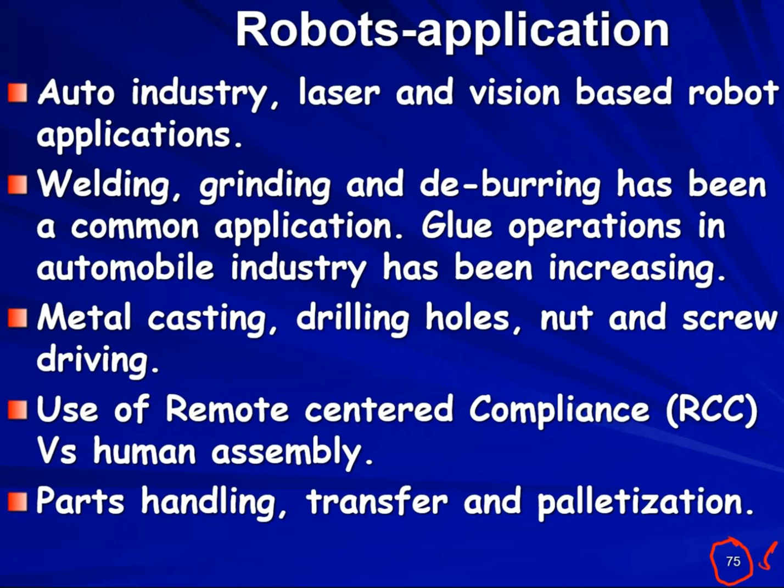Parts handling, transfer, and palletization. Palletization is a word that is very commonly used in robotics, or rather in automation. Palletization is stacking row by column on a wooden pallet so that it can be wrapped and sent to the shipping for distribution. So robots are capable of doing palletization with custom written programs.

Punch press. You don't want to have a human working on a very heavy duty punch press, which can generate a fair amount of forces. So robotic loading of punch presses is also a common automation application. Loading of ingots into hot furnaces before forging is again a standard application.

Now, something not mentioned in the notes. Siemens has a jaw - I wouldn't say mechanical jaw, it's a mechanical and electrical combination. What it can do, if the CAD can program the gripping positions of the robotic gripper, as the part comes out of the furnace, it can automatically press on the part. It's almost like pressing on a hot ingot to form the shape of your final product and then cut it, so that minimal amount of work is done in turning or milling it to the final product. So Siemens has one of those in place.

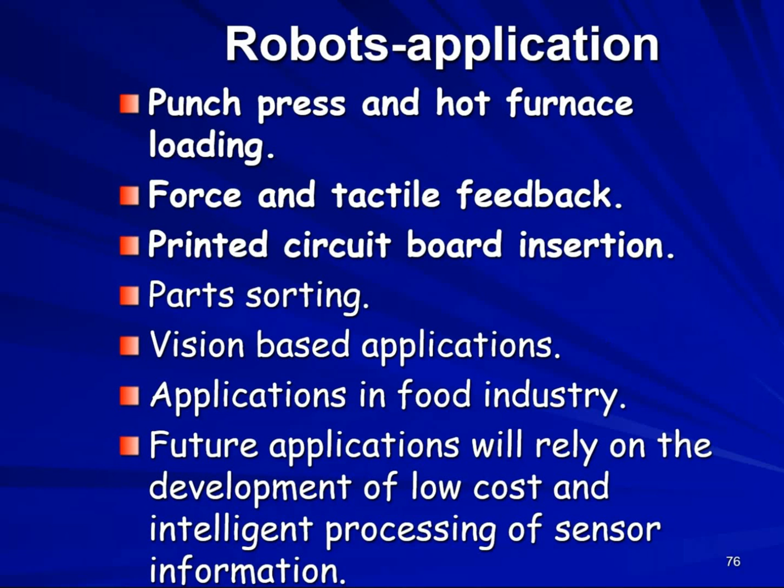Shape memory applications in automation is also there. How many of you know what shape memory is? Either in one of the material science courses, I hope.

It is actually a fairly big section by itself. Shape memory alloy has the property that if you heat it, say by 20 degrees Fahrenheit, from room temperature, which is about 68, up to 90 or 95 degrees Fahrenheit, the alloy will contract, not expand. If you take a guitar wire 1 meter long and heat it by a 20 degree rise, depending on what it's made of, it'll expand in length. The shape memory wire, say 10 microns in diameter, if heated by 20 degrees, a 1 meter length will contract by as much as 14% of its length. So for a 1 meter wire, you can almost see a displacement of 14 centimeters contraction.

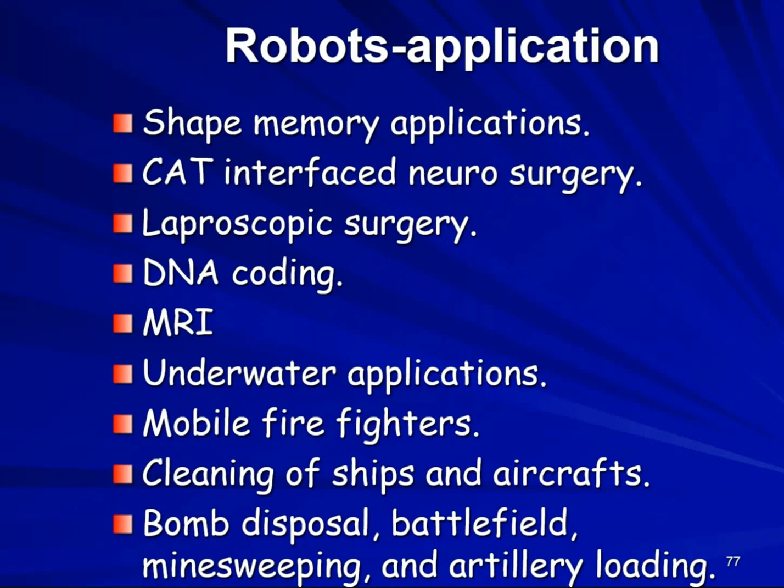Robot tailors: you want to pay $1,000 for jeans, custom developed, custom stitched to fit your contour by computerized machines. All that you have to do is stand on a revolving table and cameras scan your body and take measurements, supply them to the controller, and bang, you go. You get it within 1.5 hours.

Tree climbing robot. Well, this is something that BC, British Columbia, was very much interested in, and they do have something going. Basically, when they want to cut very tall trees, if I can launch a vehicle from the ground which will negotiate the tree branches as well as chop them and bring them down slowly and steadily, you don't need to worry about humans getting injured.

Well, I do have a machine in my house, custom developed, which will climb poles like a monkey. Again, I did this work with Nish when he was in school.

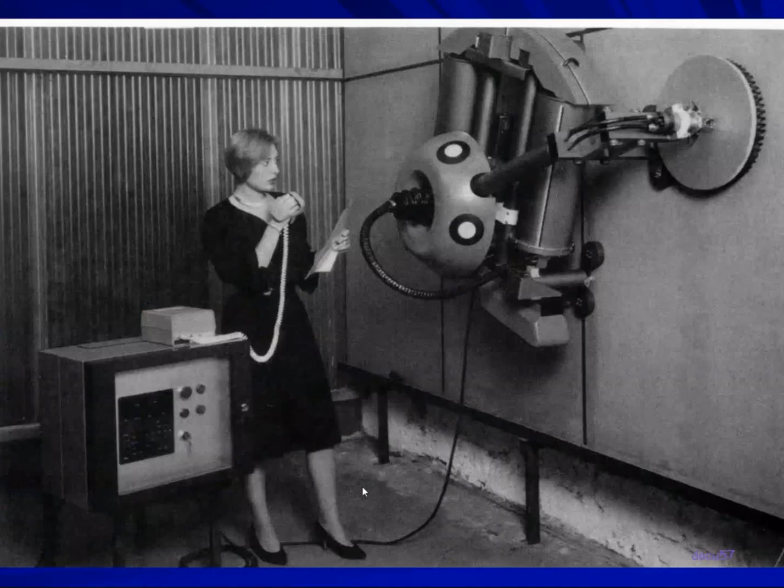ambulations. So the biologically inspired machine, which is also called biomimetics, is a fair amount of work that is being explored in this area. In fact, I have about 10 hours of presentation on this aspect, but again, it doesn't fit with this course structure.

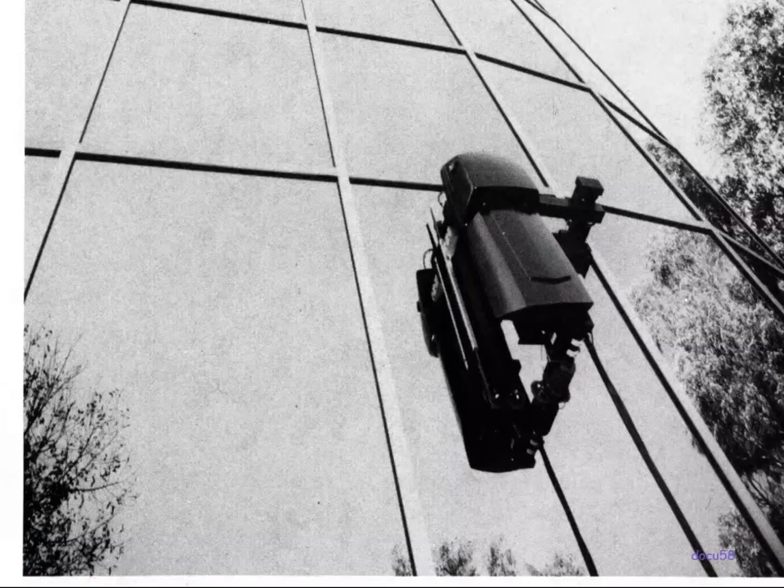Now, I talked about cleaning of the hull of a ship. This is way back 30 years. Archive copy, black and white. Now, this is a French invention. So the principle is what is important here. So what you have here... Oop. Yep. Yes, my pen writes.

What you have here is a wire brush which will spin with the motor here. Okay. Now you have underneath here a magnetic clamp, and you have suction cups here. So these two can alternate or can be gripping the metal at the same time. Because it's got a magnetic gripper here, obviously for non-ferrous metal applications you have to come up with something else.

So this is what will happen. Let's say the vehicle is grabbed here and here at this location. Then you start spinning this. It'll clean this area, and it's also a boom that can move or rotate so that you have a sweeping surface here that it'll clean. Then you take the suction out, keep the magnetic clamp, reposition this here, okay, and then clamp this and reposition this here. You will start propagating in this direction.

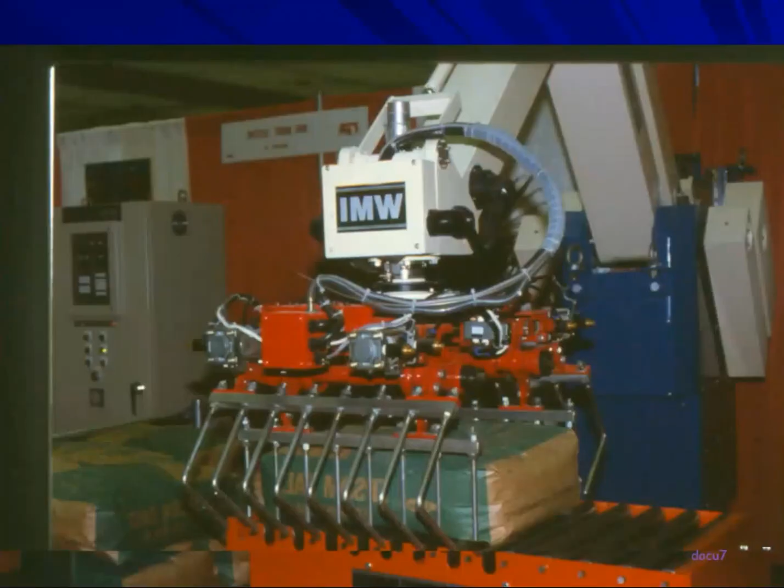Now, in the robotic applications, nothing is more important than what goes as the end of arm gripper. It's called the EOAT, end of arm tooling. Okay? Now, I constantly talked about handling sandbags, salt bags, cement bags, whatever, 25 kilograms.

Now, here is an application where a sandbag is posted somewhere downstream here, away from the scene of action. Let's say somewhere here. As you see now, there are a lot of bags here. Somewhere further out, it is being filled and sealed, and it is finally transported into this conveyor. And you want to take it and start putting it somewhere else. How would you grab the sandbag from the conveyor? Here is a neat idea.

Okay? So you see here scoops cut on the conveyor, and you see these fingers, many of them. There will be a similar set on the other side. So when you actuate this gripper, these fingers will go hug the bag and their end will go underneath. So it's like grabbing with multiple fingers and then lifting it, because the instability of the bag will not allow putting suction cups or whatever other type of grippers on top to lift it. So here is a device commercially available to handle that type of flexible material that is being packaged.

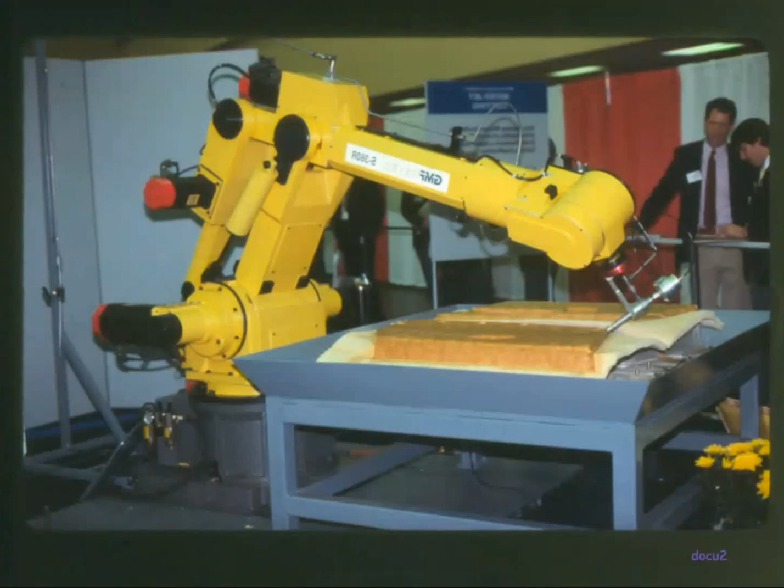Okay. Now, here is a panel which is fiberglass and is being worked to trim it. Fiberglass, whatever, you don't want humans in the loop. So this end of arm tooling here will allow it to trim the panel after it comes from somewhere else to the precise shape, a robot application.

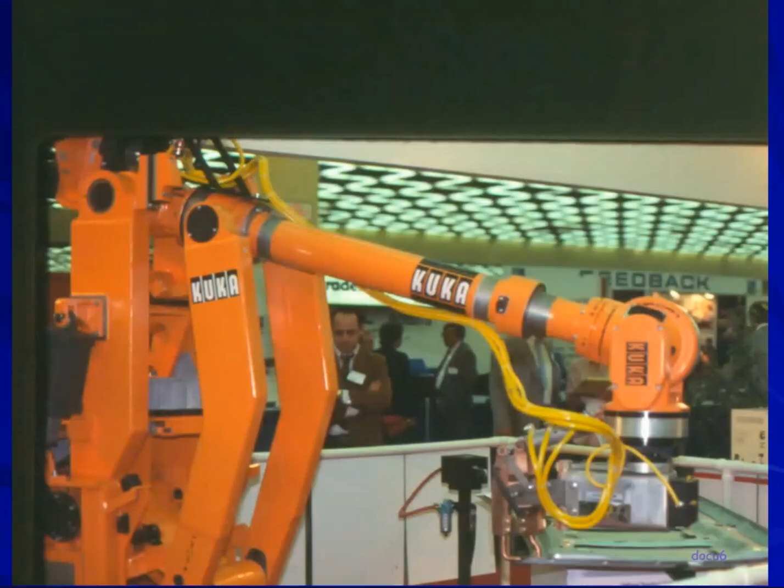Now, what is shown here is a spot welding application. In the case of a spot welder, you have the panel held in a fixture, so you don't move the panel. You move the robot arm with the spot welder, which looks massive, and then go and spot weld wherever you want. Okay, so the payload is consumed by the spot welding gun that is attached to the robot, because it doesn't have to carry any other load.

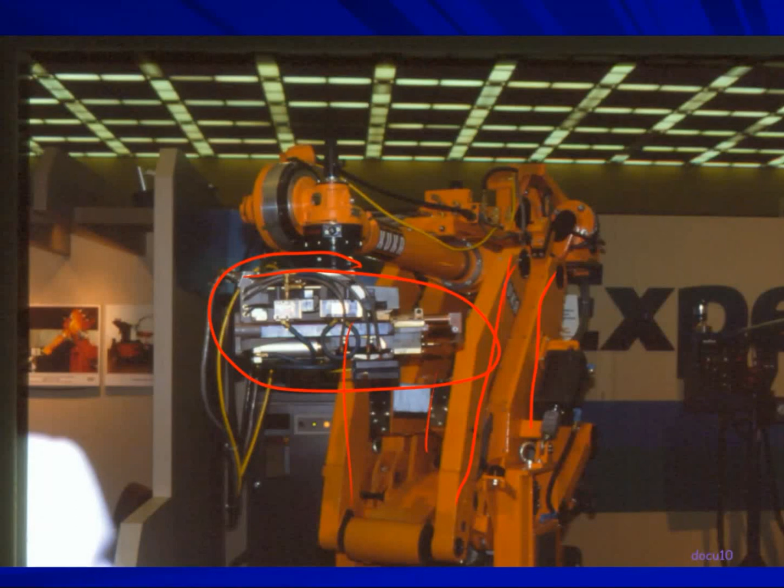Okay? Now that's another view of the spot welder. You can see how massive it is, and you can also see the parallel arm configuration, articulated configuration robot used. Another view of the robot with the spot welder. It's made by KUKA, and I have a KUKA in my lab, and this is a Nachi, which doesn't exist anymore. That company has become something else. Basically, why I brought this slide is to show the massiveness of the end of arm tooling, and they don't need to carry any load. They move to the workplace.

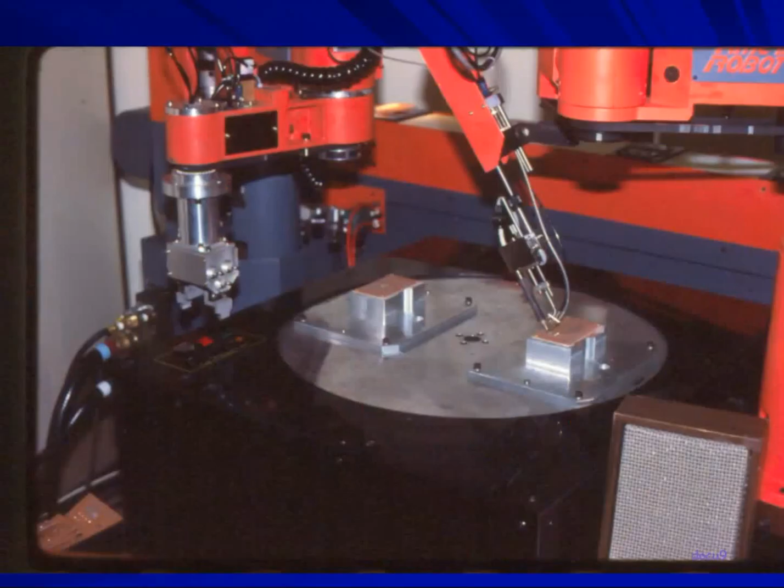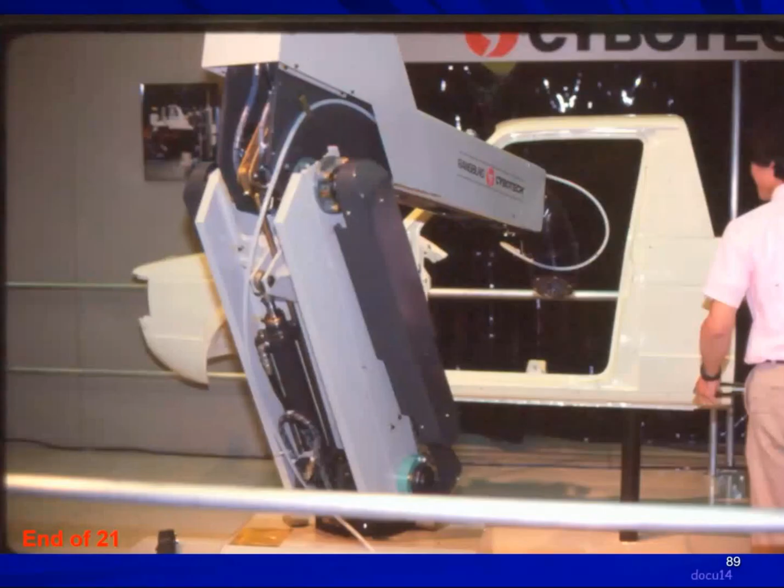Now, soldering and desoldering in the electronic industry can be combined by using, in this case, a SCARA configuration robot. This is the end of arm tooling that will do the job of solder and desolder. Okay, painting, very standard application you are going to see in my videos. Printed circuit board population. Here I have a SCARA configuration doing the job.

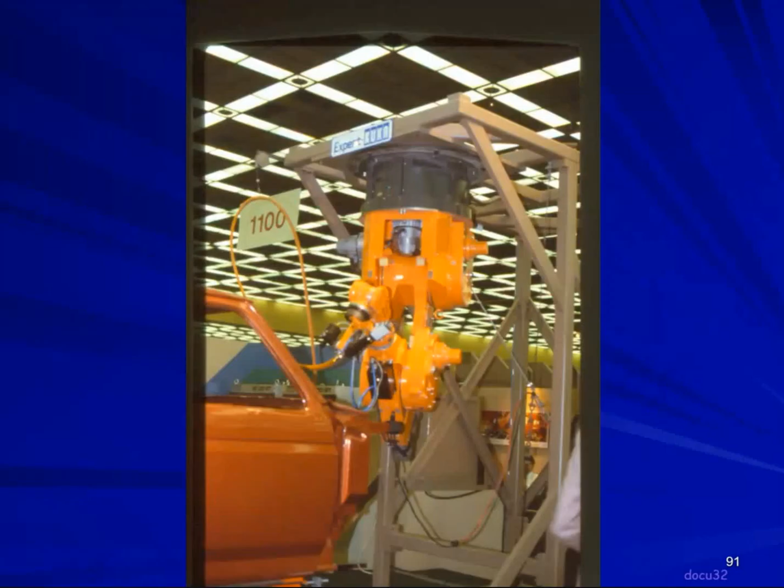Okay, I think I mentioned this. A robot can be hung upside down, but if a robot is designed to be put on the floor, you don't hang it upside down. There are some parameters that have to be changed, some mechanical design that has to be changed, but it can be done. It increases the work envelope substantially.

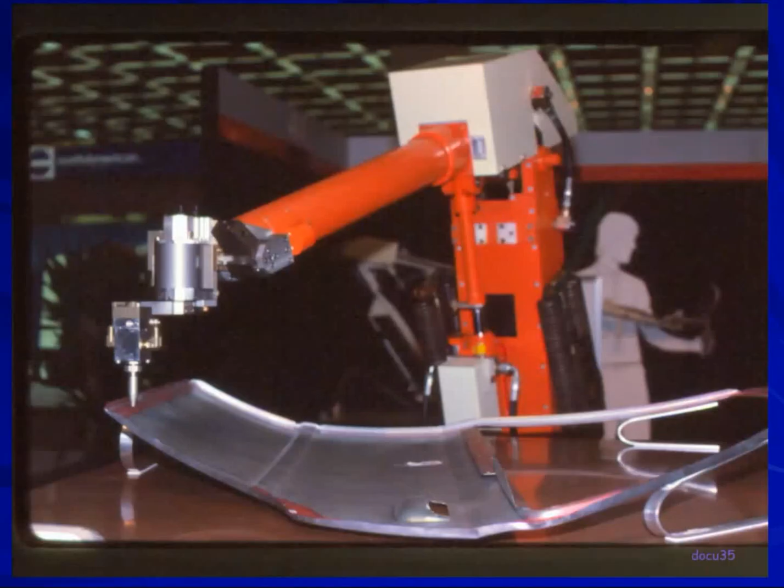Okay. Now, here is a case where all that I want to do is to pour glue all around here on a contoured body. So this is my glue gun, and you program the machine in whatever way you like. It'll accomplish the job without any problem. Plus the size of the bead is going to be pretty repetitive, consistent, as opposed to a human doing the job. It's like caulking. If you want to replace the caulking on your tub because it's old and has mildew deposited, well, you try caulking for the first time, you're not going to like what you did.

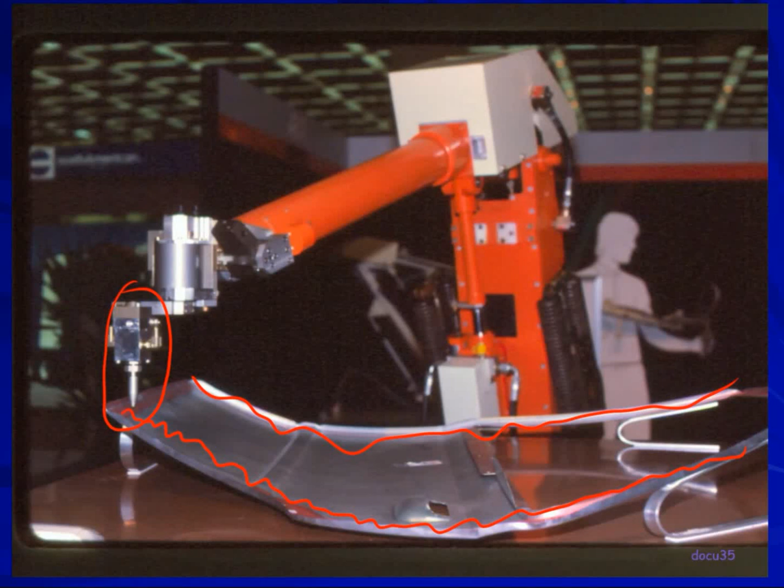But with experience, you will gain there. With the machine, no need to worry about it. Now, this is another application that is pretty powerful in the area of robotics.

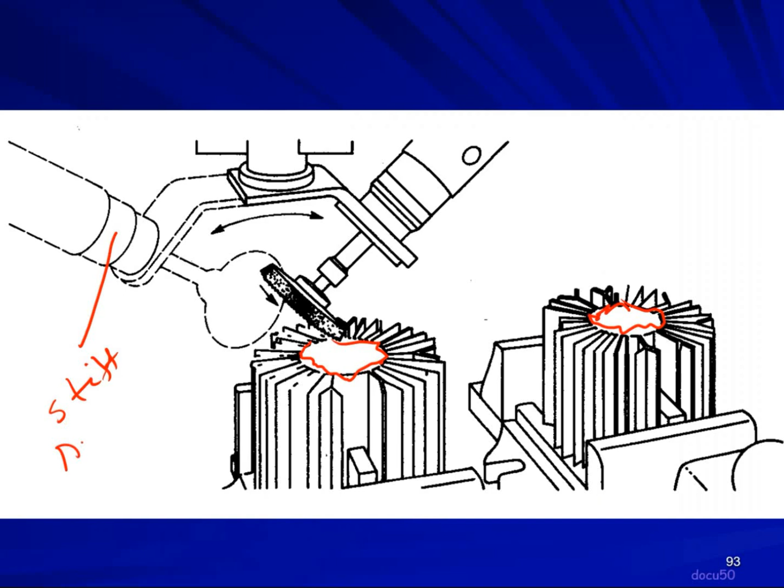Deburring. That means if I had sharp edges all around from molding or whatever, forging or machining, and I want to clean it off, robots are the best tool. But remember, robots are very stiff structures except SCARA. Okay? And stiff structure and deburring don't go well, because you have a deburring tool which is a grinding wheel, and you attach it to your motor and you take it around.

The deburr may not be uniform. This is capable of very accurate placement. This actually tells you what would be the difficulty of robots being used in surgery. Here, I have to feel the force that I exert here and adjust. Plus, this grinding wheel is also going to slowly and steadily wear out, right? So I must perform compensation.

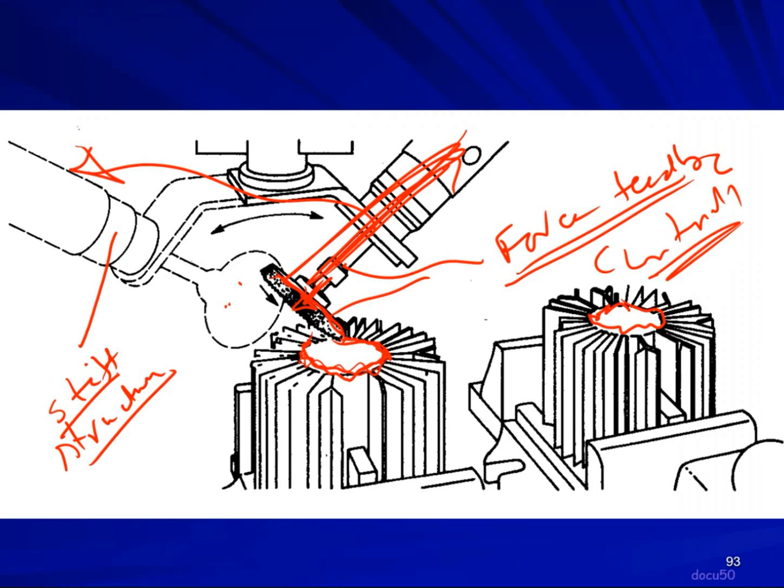So if I get a force feedback from this device and interface it to the controller of the machine and apply constant force by compensating the end of arm's position, well, it's a much better proposition, right? That's exactly what you would need. And to talk about just the word force feedback, it's not as simple as what I'm telling you. This is from a control perspective. You have to do the model. Okay? So again, I do this in the graduate course.

Now, I'm not going to go too deep into the actuation because I do it in SEMA 2. When you take the robots, we talked about hydraulics, pneumatics, and the electric as being the actuators. Hydraulics can be used either as a linear actuator or as a rotary actuator. And the principle of hydraulics is pumping oil through a piston and a cylinder to extend or retract.

So if I had a hydraulic cylinder and a piston extending, and there is a port here, and I have an inner cylinder on which this piston is moving, and I have another port here. If I send oil pressure here, obviously it displaces this way. And if I send oil pressure here, it displaces this way.

Now, if I put a control valve here, where I can control differential pressure across this, oil being incompressible, I can maintain some position control in the case of hydraulics. This can be done for linear or rotary actuation. I can also get feedback, position feedback of this cylinder's extending and retraction position and develop more.

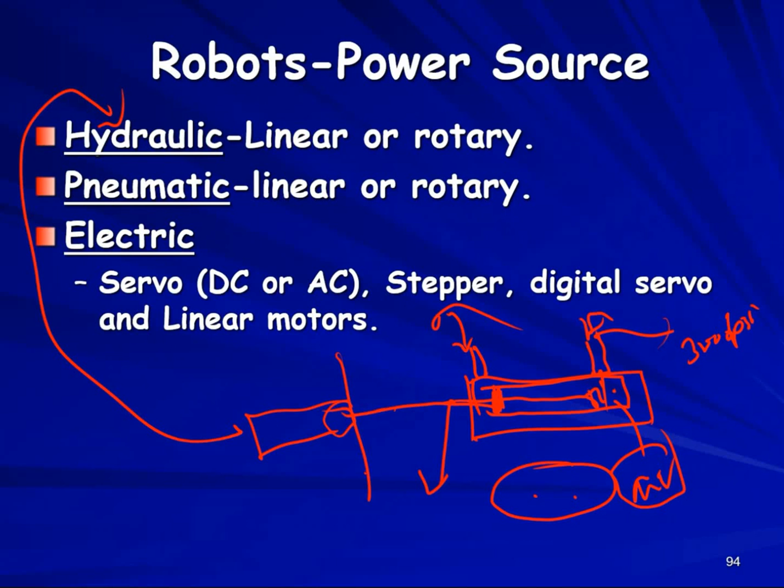The pneumatics is very similar to hydraulics, except instead of oil pressure, you use air. And once you talk about air, we talked about it in the last lecture, compressibility starts coming into play. So you can't really model to bring it to an intermediate position with the air on this side and air on this side and a load W or force that is going to come in this direction, counteracting position. So what would be the compressibility of this air? How does it come into play when the force comes into play? Well, anything is mathematically possible, but to implement it is another ball game.

But if I'm looking at a bang-bang controller, as I said in my last lecture, move from a home position to an advanced position and stop and stay there, this will do it. But it does not have the capability of delivering as much force or ability to carry big weights. Pneumatic will not be there.

But extremely fast. From here to here, within a matter of 1 second, at a distance of 10 centimeters, 20 centimeters, a meter is possible. Because it's a function of how well the cylinder is built, what is the friction, what is the o-ring that will be used, and the magnitude of pressure that you're going to apply. Okay, different loads can be lifted by varying the pressure. Like in SEMA 2, most of the applications will be centered around 30, 20 psi, even though we have about 90 psi available in the university's air supply.

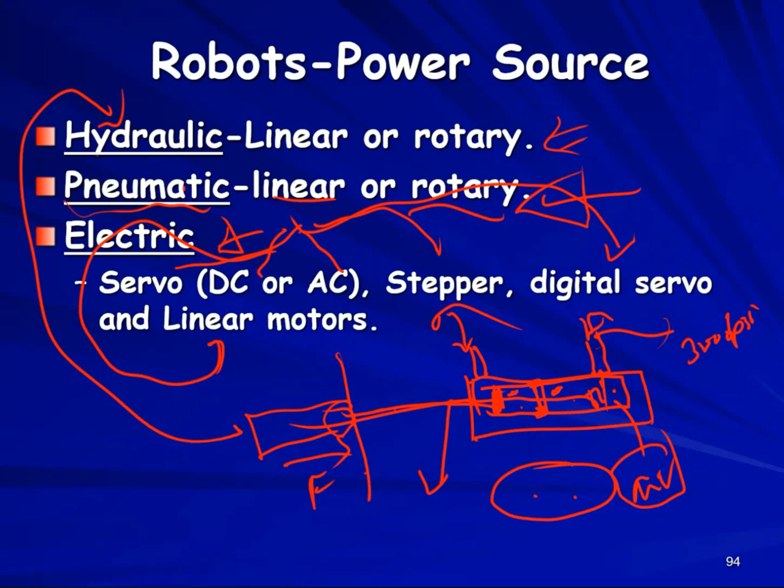Electric, in comparison to hydraulic, will have lesser load capability, because you can't keep increasing the size of the motor. You can't put a motor that's normally used in elevators, carrying 1,300 or 1,500 pounds, with a huge motor sitting at the roof. You can't put six of those in a robot and say I can lift. The robot will not even move, because the different links are at different lengths, and you can't put the motors at the end of the links.

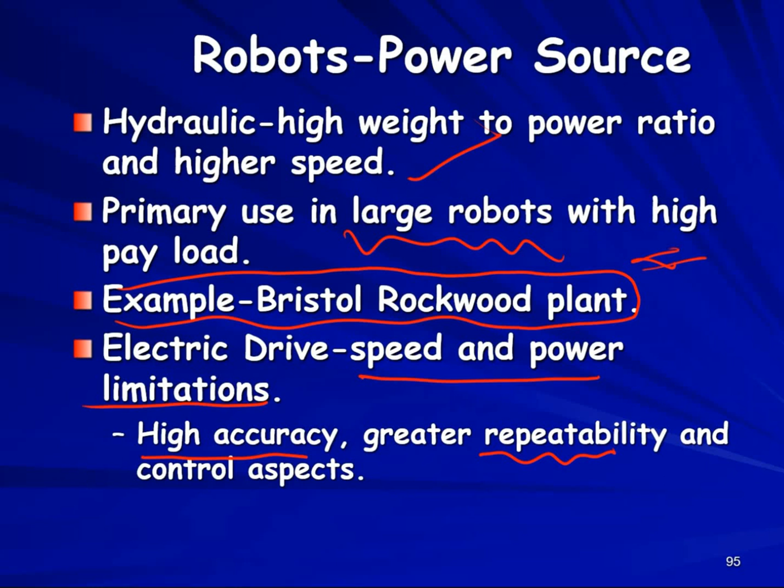Pneumatic is ideally suited for pick and place applications. It's the least expensive and best for PLC application. Pneumatics do not have proportional control aspects, meaning I can't go to an intermediate position. Feedback to monitor position and velocity will not work with pneumatics. There is no such capability.

Precise control of position, the answer is yes, because you're driving it against a hard stop and retracting it to a hard block stop.

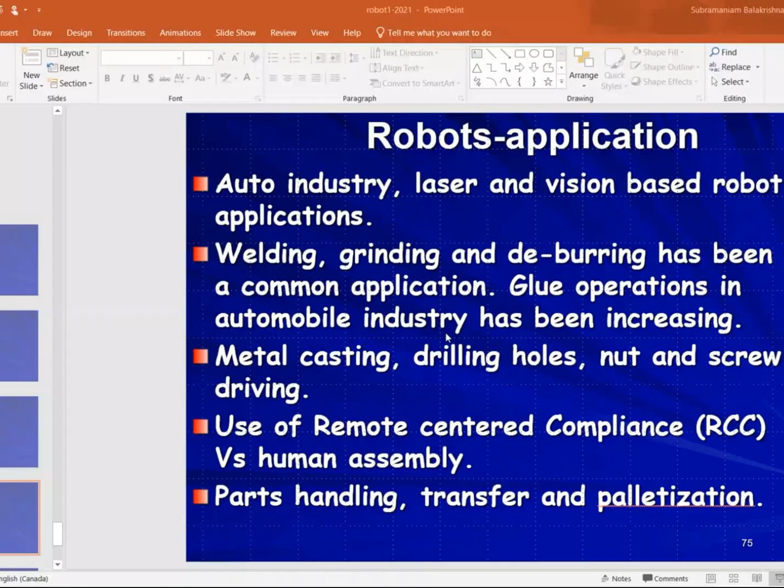Now I hope my video will come up. Do you see anything happening on my screen? I see just a gray screen with your mouse on it. What do you see now? Still nothing, Professor. Somewhere it got closed. Okay, let me get to it, just give me a few seconds. In the meantime, you can ask me questions if you have any.